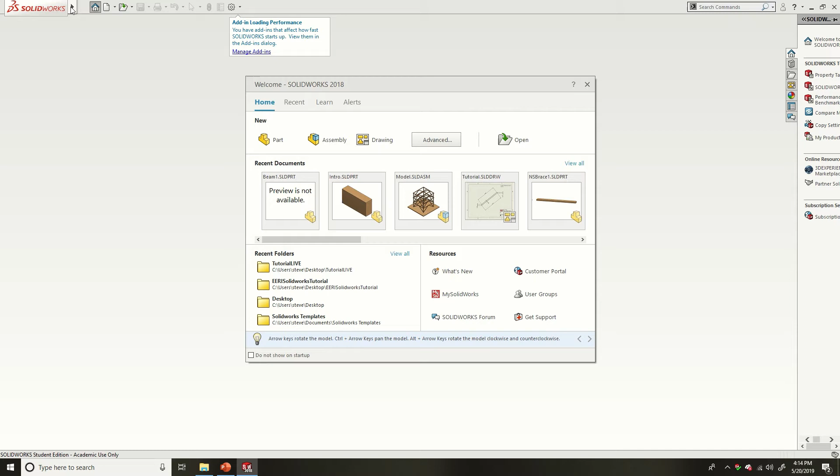So, like I mentioned before, you want to open the template for parts. You can either select here, open, and it'll pop up, or you can go over here, file, open. We're going to open that part template that I've sent you. We're going to open part, inches, ANSI. So let's go with that. Open.

As that opens up very slowly, we're then going to double check. Is it the right template? Yes, it is. It's in the right units, IPS. So to start off making our part, we have to give the general idea of what this shape is. But before we do all that, we must save this. So let's go ahead and save as. Because it is a template, you need to save this as a part.

So first, what's the name of this part? This is going to be beam one. Important right here: you've got to make sure you change this save as type to part. There it is. Beam one. Double check after you type it in. Part. There it is. Save. Now you've converted your template into a part file with the correct name of that part.

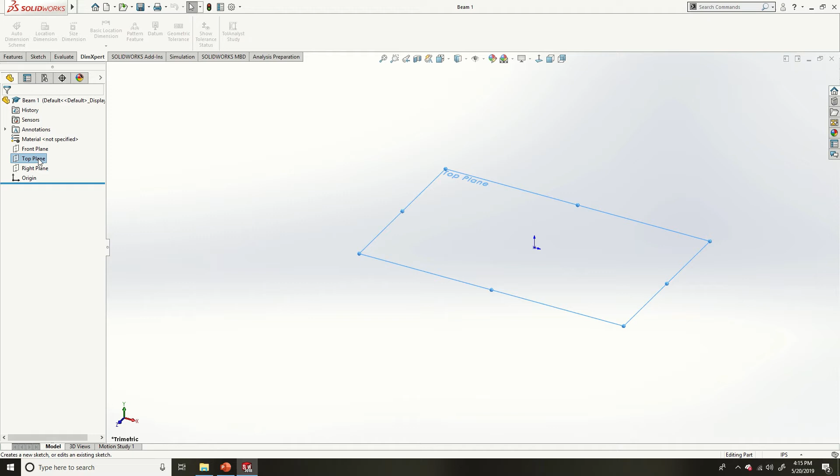All right, now you've done that, let's start drawing. What does this shape look like? So let's go to top plane. You can either left click, and you'll have the sketch option right here on the top right, or you can right click and you'll have the sketch option right here. So let's go ahead and select that. Since you already are in the sketch option, this ribbon will change for you.

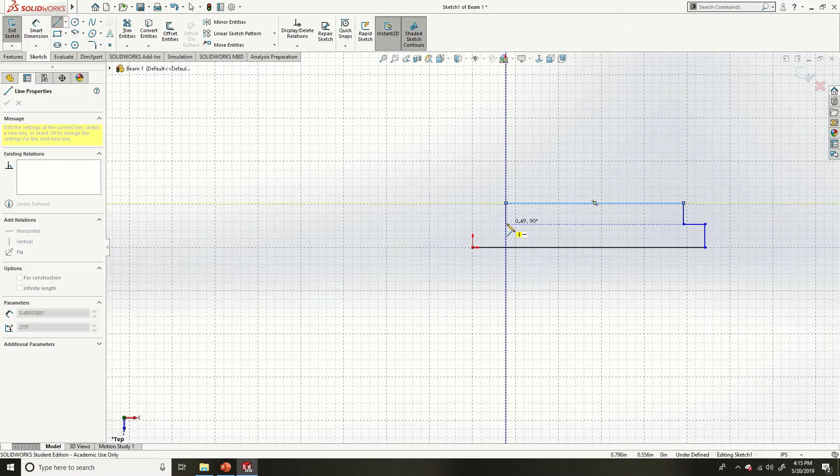We're going to select a line, and we're going to give the general shape of beam one. So we're going to click on the origin, and we know it has a tongue and groove up here. Let's just give the general shape of it. See right there, it has those dotted lines. If I click here, it's going to be at the same height as that other tongue and groove on the top and the right. So let's select that, and close.

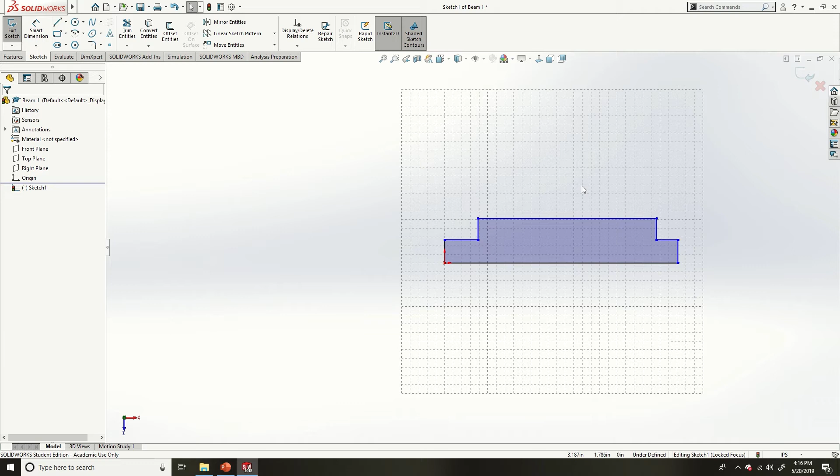Just like I mentioned before, the reason these lines are blue is because they're not fully defined. As you start giving dimensions, slowly each line will start turning black, and then this will change to fully defined once you've defined them all. So we've drawn our lines. Let's go over to the left panel and close that off. You can either keep pressing escape and these panels will go away, or you can just press those check marks. I'm going to center click the mouse so it fits in the window.

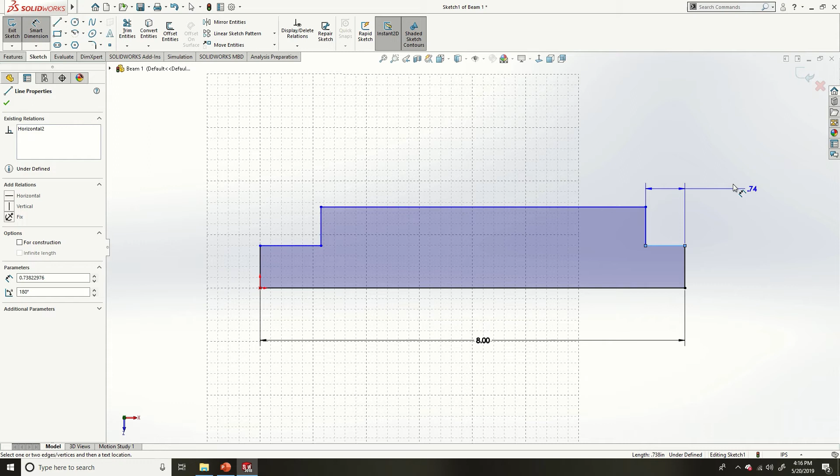Now we have our lines. Now we've got to give them dimensions. So we're going to go up here on the top left, smart dimension. It'll basically dimension each line. Let's line this up with the drawings. This on the drawing is 8 inches. So I'm simply left clicking that line and scrolling down, and when I left click, this option pops up: 8 inches. Let's change this right here to 0.2. This one on the left is 0.2 as well. 0.2. All right.

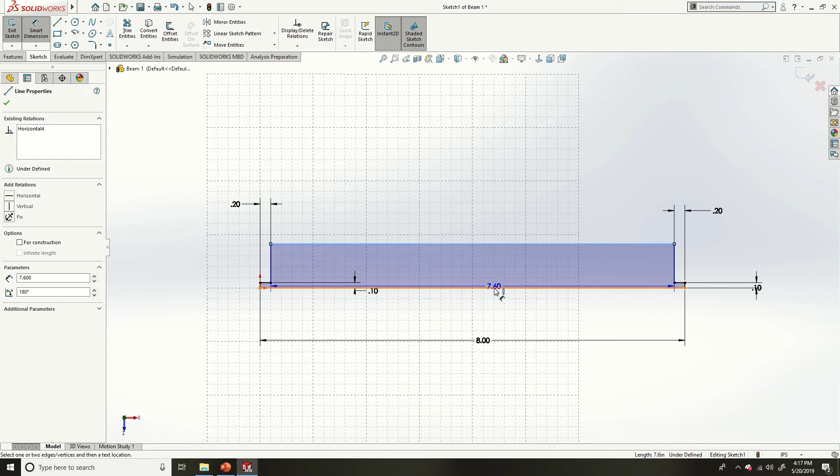Then let's select how far is this line from here and here. This is 0.1. So we want this line to be how far from this line? We want it to be 0.1 inches. Okay, and how far we want this line to be far from this one? We want this to be 0.2 inches.

So there it is. There's your general shape. Is everything black? Yes, it is. Everything is black, meaning fully defined. One thing to know is this side is very similar to this side. You can honestly just change a few line properties. So let me just show you that.

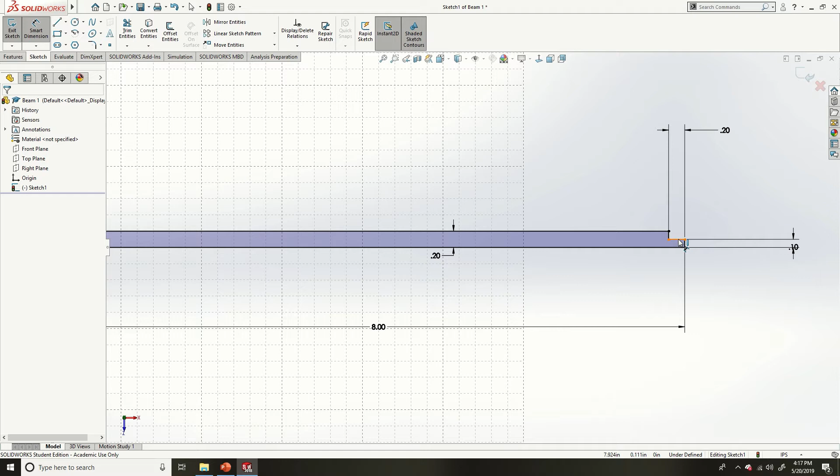By deleting this dimension. See, now that I've deleted it, this has now turned to blue. But since this line is same as this, I could have done this to begin with. I could simply select that line. I'm going to press escape so I can get out of the smart dimension option. So I'm going to select that line, hold control, and select this line. Hold control to select multiple lines.

And you're going to have this properties tab over here on the left. And I want to make these collinear, so that way whatever dimension I put on one, it's going to do it to the other. So in this case, collinear. Sometimes you can change the property to parallel, perpendicular, horizontal, vertical. For this case, let's go with collinear. Because I did that, that's the relationship they will have.

Now I can do check, and there it is. This other one was defined because since it's going to be collinear with this line, and it has this dimension, it's going to be fully defined. So because of that, it's done. All right, cool.

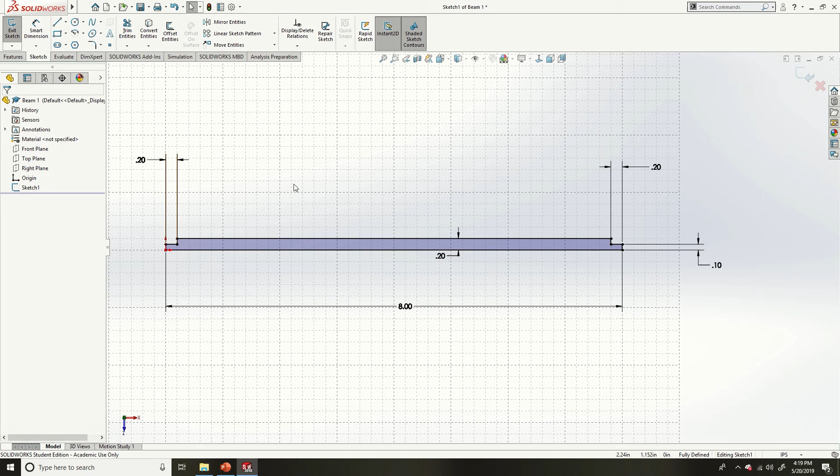Let's now move forward, so our sketch is done of the beam one. We can exit by pressing top left out here. Actually, no. We're going to go back to edit sketch. I forgot. You want to make this into 3D. So sketch is 2D. Let's make this 3D. So we're going to go to the features option, and we're going to extrude a shape.

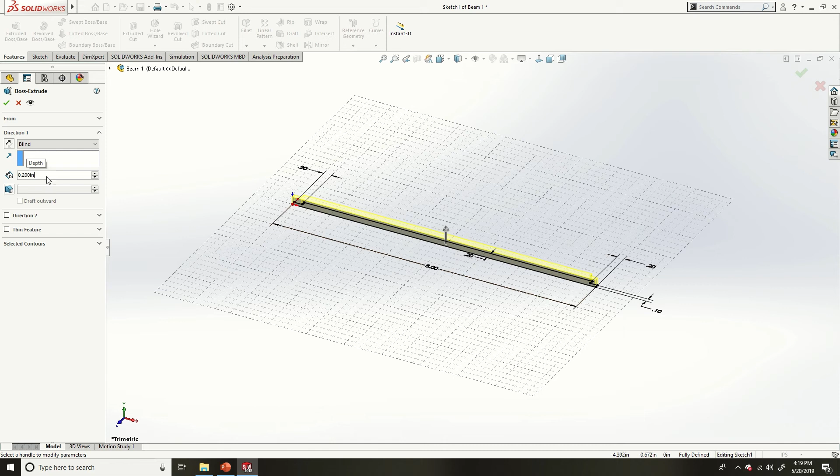So once we've extruded a shape, this is always going to pop up on blind, the preferred method. This right here on the left allows you to change the direction, so it can go downwards or upwards. From over here, look at the sketch. The arrow's going to change as I click blind over here, up and down. So this is going to be 0.2 inches thick, and it's going to give me a shape right now. So that's the thickness or the distance. Press check mark, and there it is. You have your 3D model.

Press Control 7 to go to ISO view. Just so you know, if you ever press Control and then any of the numbers on top, it'll give you a different view. So if you were to do Control 5, it'll be top view, 6, a different view, 7, ISO view, just respectively changing. So there's that.

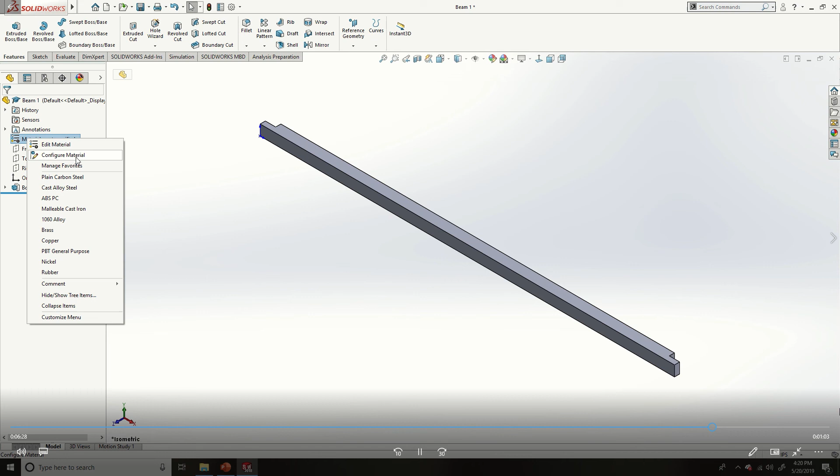Now I want to change the material of this because it's not just the beam, it's what kind of material. It's going to be balsa wood. So we're going to go over here, material. Right click, you have to right click. So you can do edit material, or you can select any of these, but we're doing balsa wood. So you have to go to this option, edit material. We're going to scroll down to woods. We're going to select balsa right there.

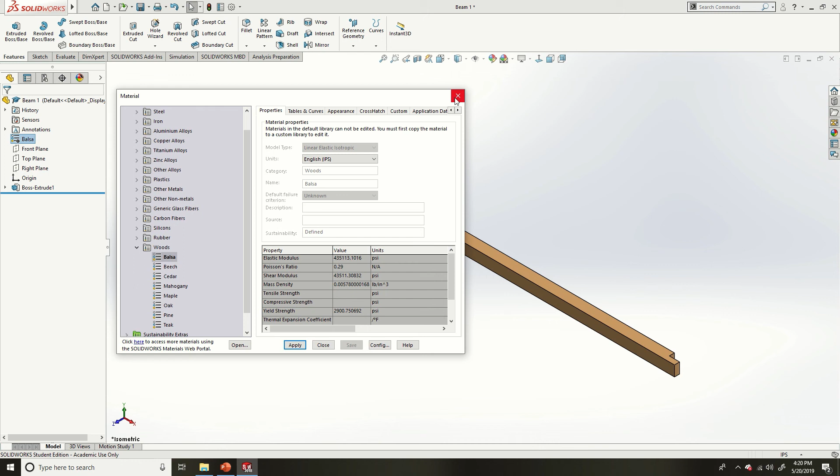It has the properties already installed, the default values. You want to make sure this is in the right units you want. Inches for us, so let's go ahead and apply that. Select that, apply. Your material will change. Okay, let's close. And there it is. There is your first part of the model.

So basically, you're going to continue this for columns 1 and 2. Get your practice going. Make sure everything's fully defined. But once again, more importantly, as soon as you open the template file to save as under the part name that you like, make sure you switch that from part template to part. And once you get that, continue following the steps instructed in this video.